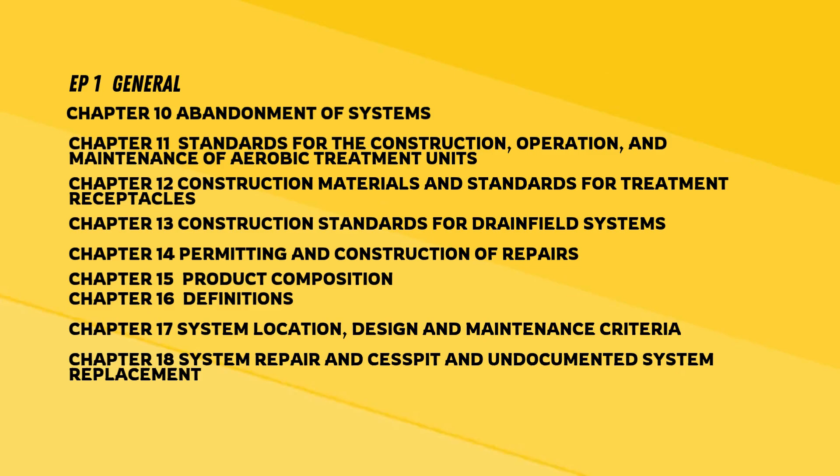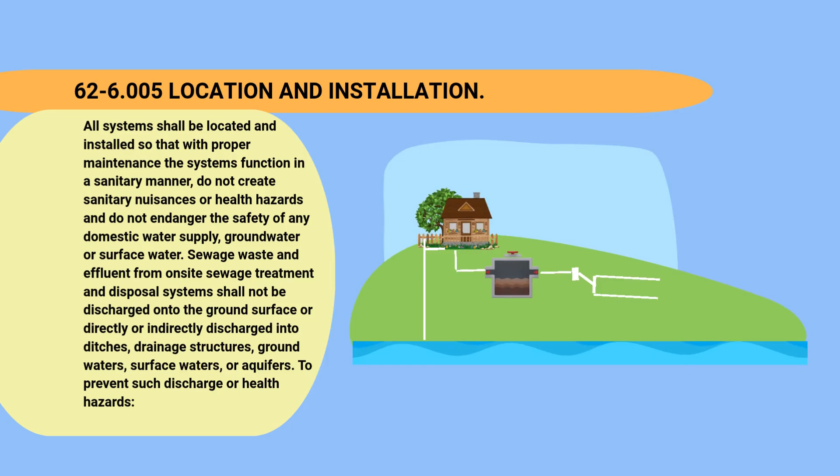All systems shall be located and installed so that with proper maintenance the systems function in a sanitary manner, do not create sanitary nuisances or health hazards, and do not endanger the safety of any domestic water supply, groundwater or surface water. Sewage waste and effluent from on-site sewage treatment and disposal systems shall not be discharged onto the ground surface or directly or indirectly discharged into ditches, drainage structures, groundwaters, surface waters, or aquifers.

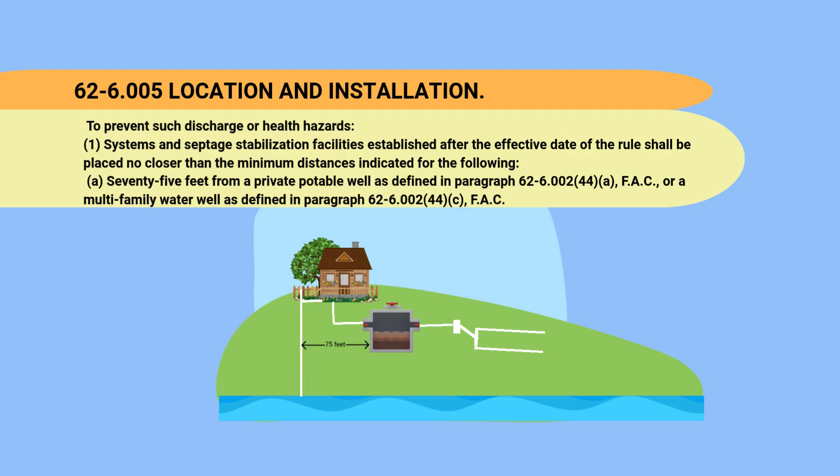To prevent such discharge or health hazards: 1. Systems and septage stabilization facilities established after the effective date of the rule shall be placed no closer than the minimum distances indicated for the following. A. 75 feet from a private potable well as defined in paragraph 62-6.002(44)(a) FAC, or a multifamily water well as defined in paragraph 62-6.002(44)(c) FAC.

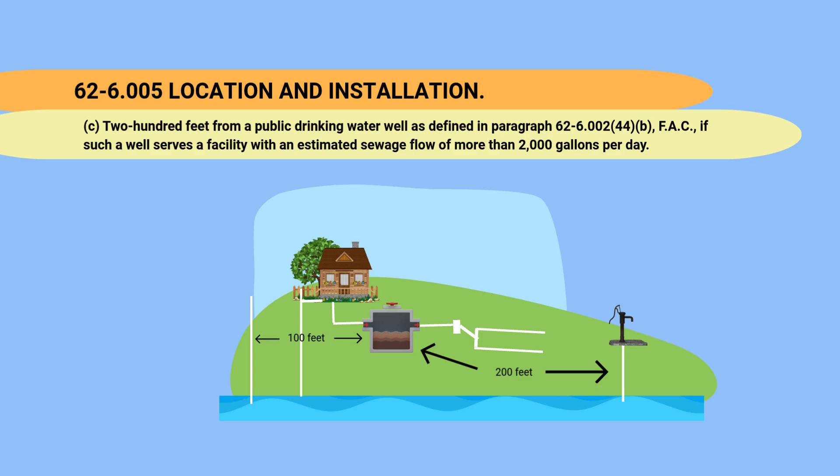B. 100 feet from a public drinking water well as defined in paragraph 62-6.002(44)(b) FAC, if such a well serves a facility with an estimated sewage flow of 2,000 gallons or less per day. C. 200 feet from a public drinking water well as defined in paragraph 62-6.002(44)(b) FAC, if such a well serves a facility with an estimated sewage flow of more than 2,000 gallons per day. D. 50 feet from a non-potable water well as defined in subsection 62-6.002(39) FAC.

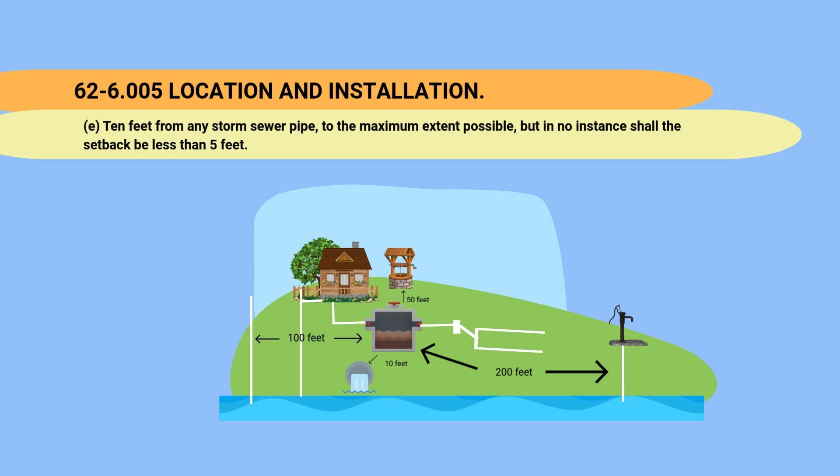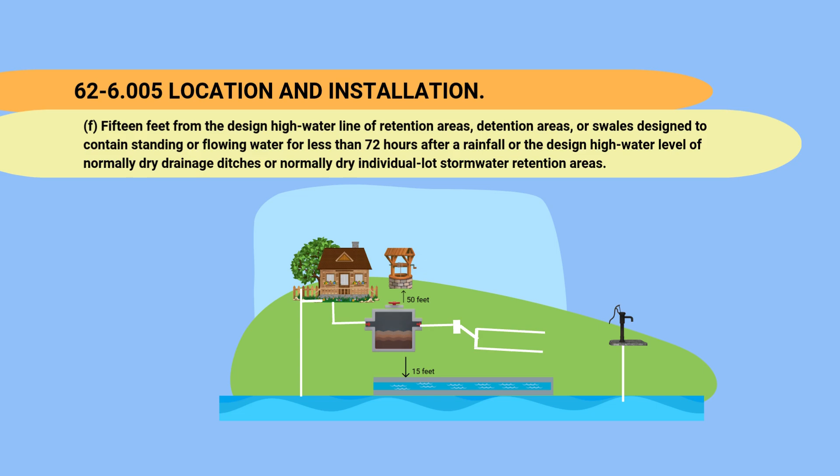E. 10 feet from any storm sewer pipe, to the maximum extent possible, but in no instance shall the setback be less than 5 feet. F. 15 feet from the design high water line of retention areas, detention areas, or swales designed to contain standing or flowing water for less than 72 hours after a rainfall, or the design high water level of normally dry drainage ditches or normally dry individual lot stormwater retention areas.

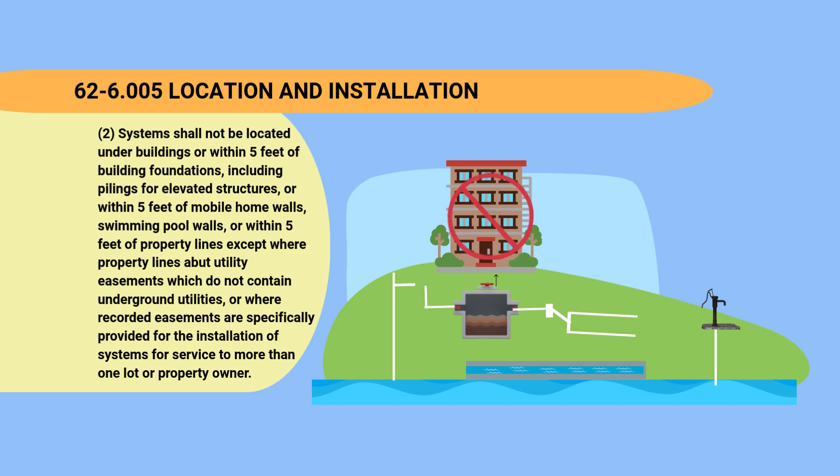2. Systems shall not be located under buildings or within 5 feet of building foundations, including pilings for elevated structures, or within 5 feet of mobile home walls, swimming pool walls, or within 5 feet of property lines, except where property lines abut utility easements which do not contain underground utilities, or where recorded easements are specifically provided for the installation of systems for service to more than one lot or property owner.

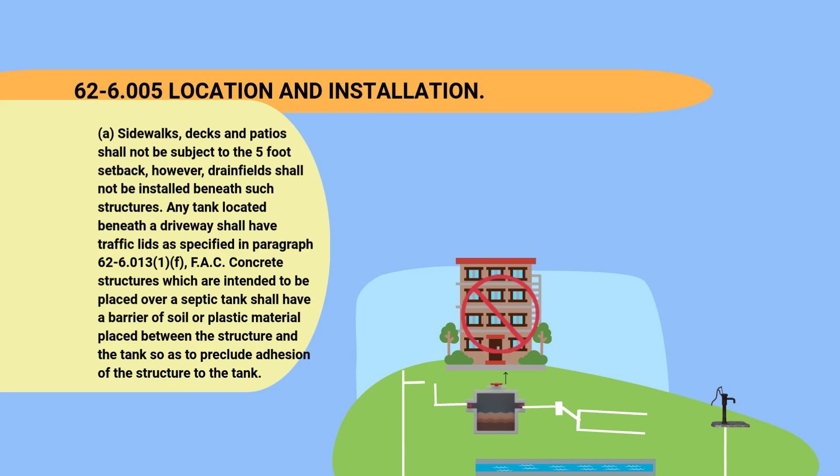A. Sidewalks, decks and patios shall not be subject to the 5-foot setback. However, drainfields shall not be installed beneath such structures. Any tank located beneath a driveway shall have traffic lids as specified in paragraph 62-6.013(1)(f) FAC. Concrete structures which are intended to be placed over a septic tank shall have a barrier of soil or plastic material placed between the structure and the tank so as to preclude adhesion of the structure to the tank.

B. Systems shall not be located within 10 feet of water storage tanks in contact with the ground or potable water lines unless such lines are sealed with a waterproof sealant within a sleeve of similar material pipe to a distance of at least 10 feet from the nearest portion of the system, or the water lines themselves consist of Schedule 40 PVC or stronger. In no case shall the water line be located within 24 inches of the on-site sewage treatment and disposal system.

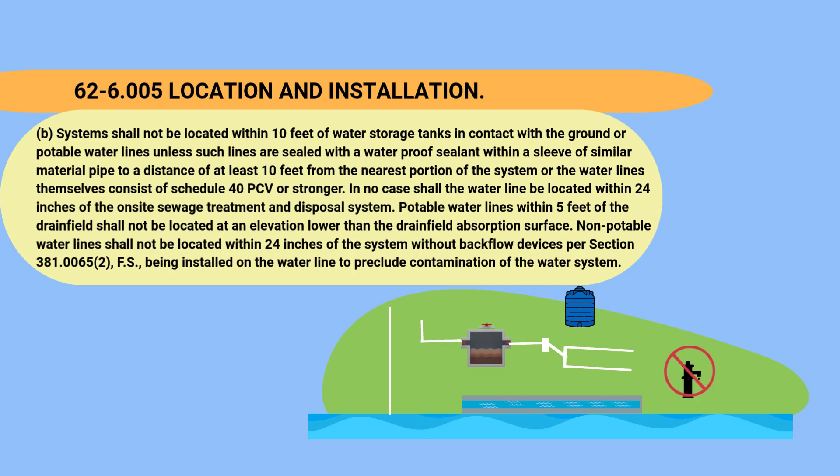Potable water lines within 5 feet of the drainfield shall not be located at an elevation lower than the drainfield absorption surface. Non-potable water lines shall not be located within 24 inches of the system without backflow devices, per section 381.0065(2) FS, being installed on the water line to preclude contamination of the water system. C. Systems shall be set back a minimum of 15 feet from groundwater interceptor drains.

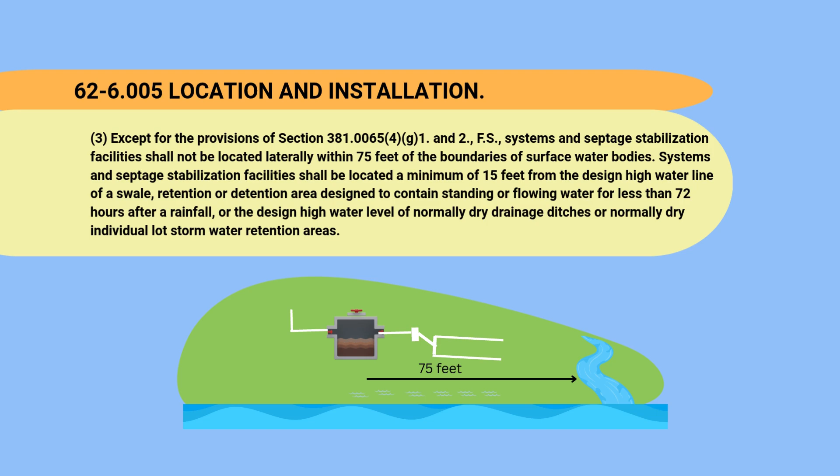3. Except for the provisions of section 381.0065(4)(g)(1) and (2) FS, systems and septage stabilization facilities shall not be located laterally within 75 feet of the boundaries of surface water bodies. Systems and septage stabilization facilities shall be located a minimum of 15 feet from the design high water line of a swale, retention or detention area designed to contain standing or flowing water for less than 72 hours after a rainfall, or the design high water level of normally dry drainage ditches or normally dry individual lot stormwater retention areas.

4. Suitable, unobstructed land shall be available for the installation and proper functioning of the system. The minimum unobstructed area shall: A. Be at least 1.5 times as large as the drainfield absorption area required by rule. For example, if a 200 square foot drainfield is required, the total unobstructed area required, inclusive of the 200 square foot drainfield area, would be 300 square feet.

Unobstructed soil area between drain trenches shall be included in the unobstructed area calculation. B. Be contiguous to the drainfield. C. Be in addition to the setbacks required in subsections 1, 2, and 3 above. 5. On-site sewage treatment and disposal systems.

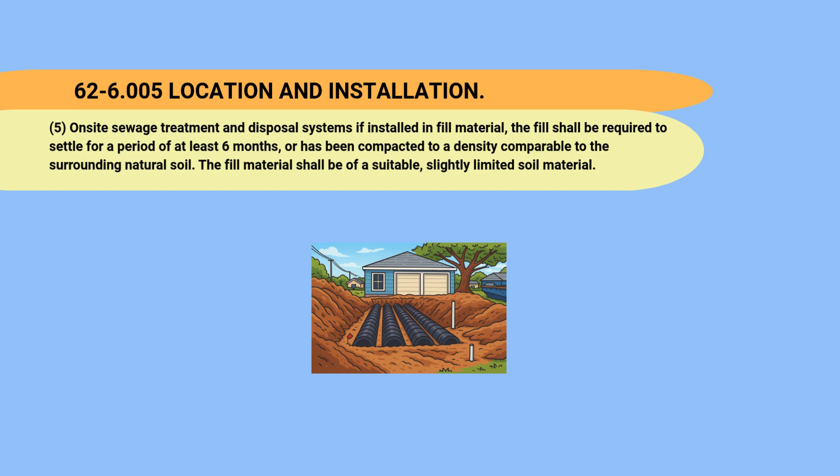If installed in fill material, the fill shall be required to settle for a period of at least 6 months, or has been compacted to a density comparable to the surrounding natural soil. The fill material shall be of a suitable, slightly limited soil material.

To prevent soil smear and excessive soil compaction, drainfields shall not be installed in soils with textures finer than sand, loamy sand, or sandy loam when the soil moisture content is above the point at which the soil changes from semi-solid to plastic.

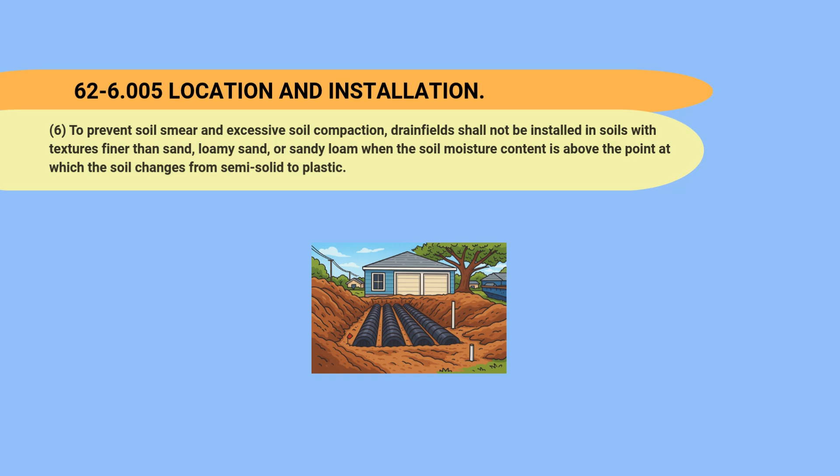On-site sewage treatment and disposal systems shall be installed where a sewerage system is not available and when conditions in sections 381.0065(4)(a)(g), F.S., are met.

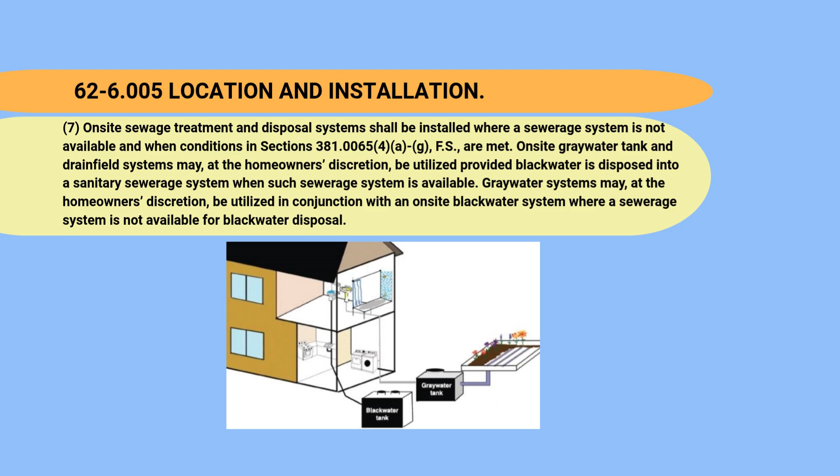On-site graywater tank and drainfield systems may, at the homeowner's discretion, be utilized provided blackwater is disposed into a sanitary sewerage system when such sewerage system is available. Graywater systems may, at the homeowner's discretion, be utilized in conjunction with an on-site blackwater system where a sewerage system is not available for blackwater disposal.

A. The lot area under section 381.0065(4)(a), F.S., must consist of at least 1/2 acre, 21,780 square feet. Contiguous area outside of the lot must not be included.

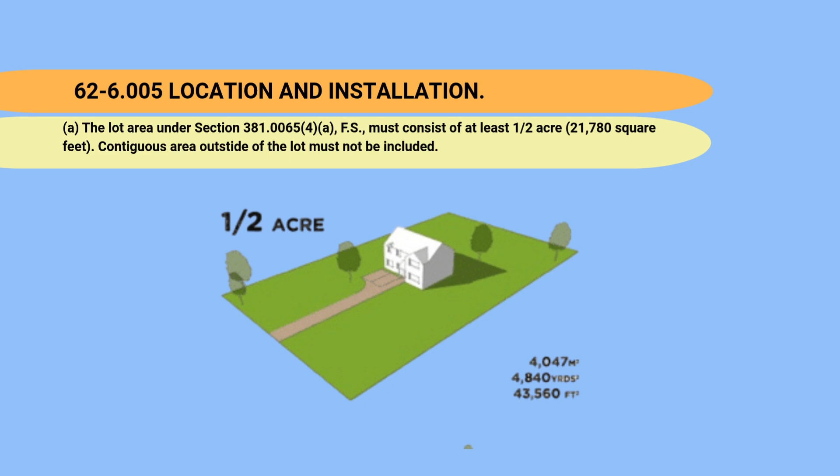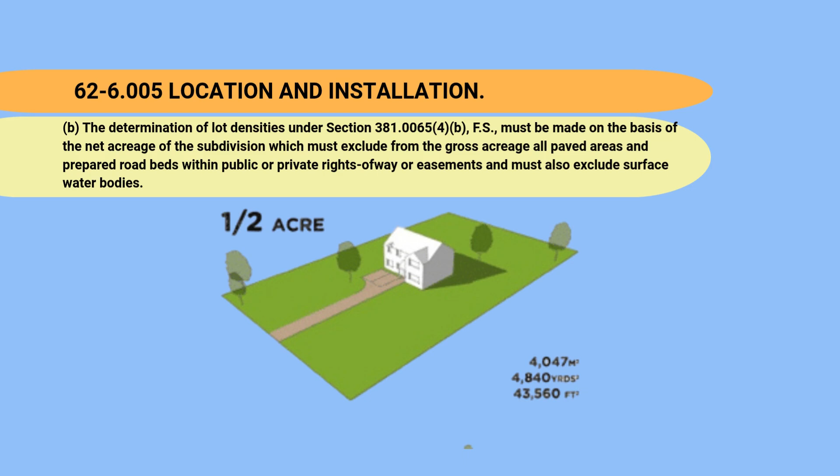B. The determination of lot densities under section 381.0065(4)(b), F.S., must be made on the basis of the net acreage of the subdivision, which must exclude from the gross acreage all paved areas and prepared road beds within public or private rights of way or easements, and must also exclude surface water bodies.

C. Maximum daily sewage flow allowances specified in sections 381.0065(4)(a)(b) and (g), F.S., must be calculated on an individual lot-by-lot basis based on its net usable area in acres. The net usable area of each lot or parcel of land does not include paved areas and prepared road beds within public rights of way or easements and does not include surface water bodies.

Contiguous unpaved and non-compacted road rights of way and easements with no subsurface obstructions that would affect the operation of drainfield systems may be included in determining the net usable area. Where an unobstructed easement is contiguous to 2 or more lots, each lot will receive its pro rata share of the area contained in the easement.

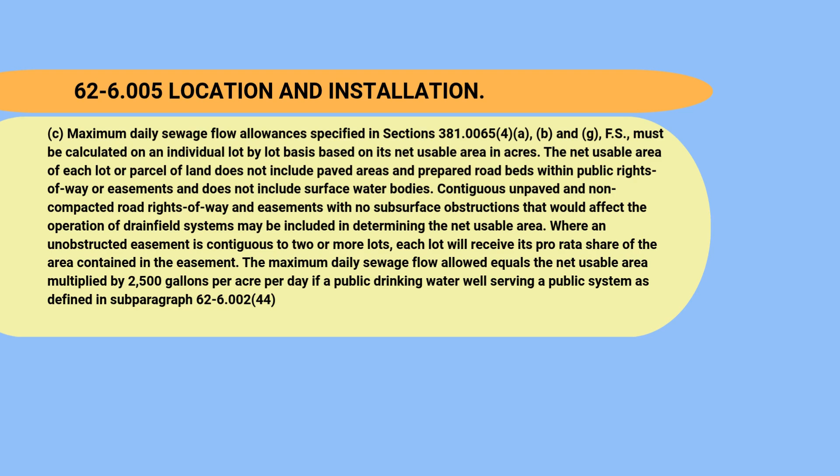The maximum daily sewage flow allowed equals the net usable area multiplied by 2,500 gallons per acre per day if a public drinking water well serving a public system as defined in subparagraph 62-6.002(44)(b)(1)(2) or (3), F.A.C., is utilized, or multiplied by 1,500 gallons per acre per day if a public drinking water well serving a public water system as defined in subparagraph 62-6.002(44)(b)(4), F.A.C., or a private potable well or cistern is utilized.

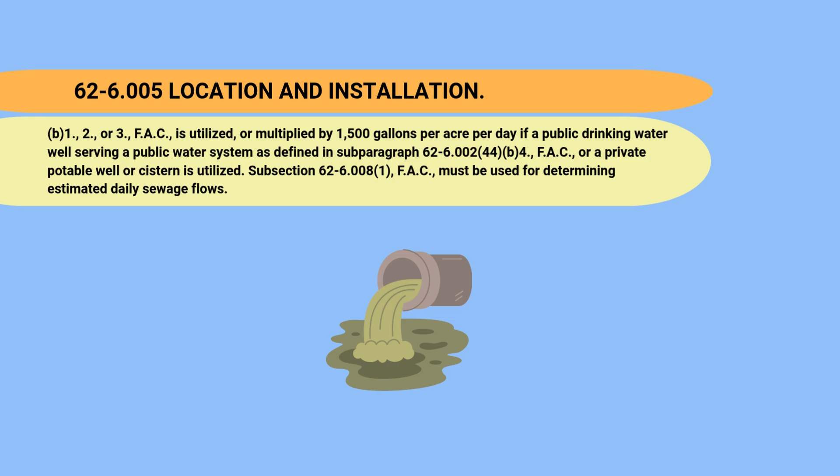Subsection 62-6.008(1), F.A.C., must be used for determining estimated daily sewage flows.

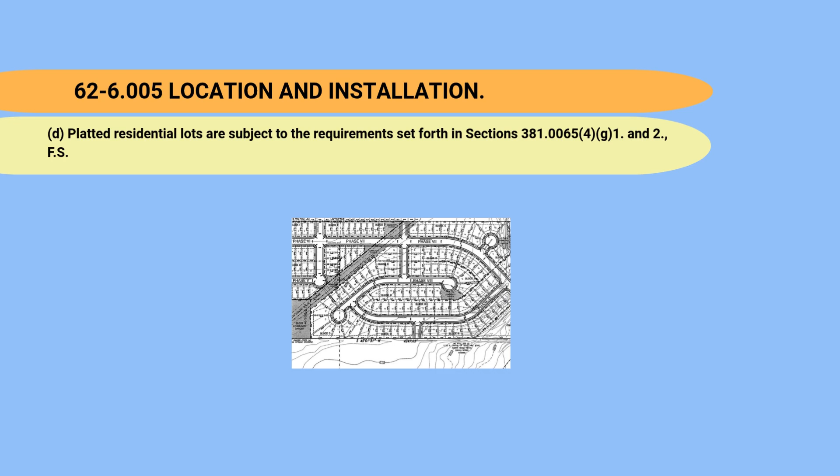D. Platted residential lots are subject to the requirements set forth in sections 381.0065(4)(g)(1) and (2), F.S., E, when portions of a lot or lots which were platted prior to January 1, 1972 are combined in such a manner that will decrease the total density of the subdivision. Pre-1972 lot provisions apply. However, the maximum setback possible to surface water bodies must be maintained with a minimum setback of 50 feet.

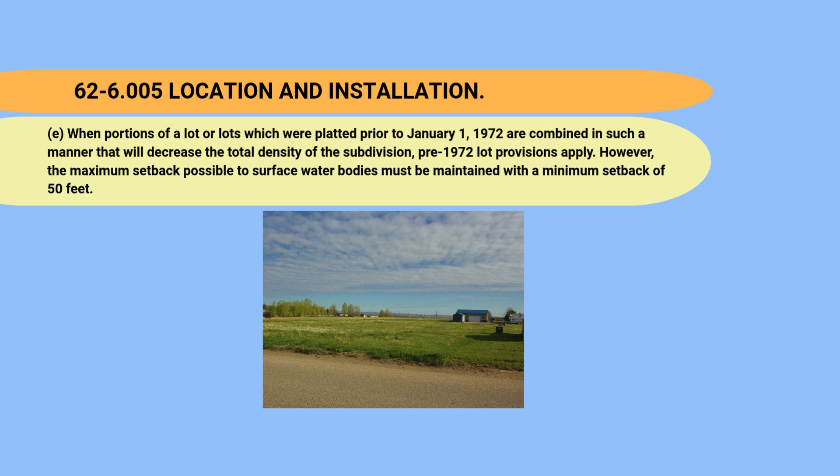8. Notwithstanding the requirements of this section, where an effluent transmission line consists of Schedule 40 PVC, the transmission line must be set back from private potable wells, irrigation wells or surface water bodies by not less than 25 feet when installed.

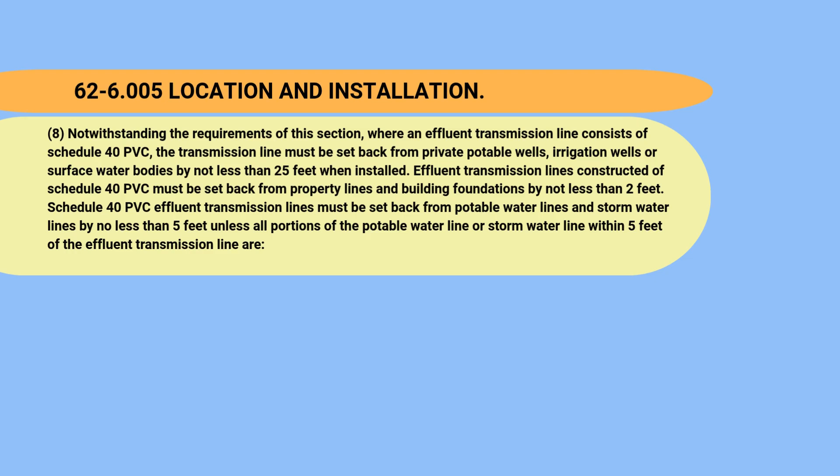Effluent transmission lines constructed of Schedule 40 PVC must be set back from property lines and building foundations by not less than 2 feet. Schedule 40 PVC effluent transmission lines must be set back from potable water lines and stormwater lines by no less than 5 feet unless all portions of the potable water line or stormwater line within 5 feet of the effluent transmission line are a minimum of 12 inches above the top of the effluent transmission line, and sealed with a waterproof sealant within a sleeve of Schedule 40 PVC or stronger pipe, or the water line itself consists of Schedule 40 PVC or stronger pipe.

9. On-site sewage treatment and disposal systems for estimated establishment domestic sewage flows exceeding 5,000 gallons per day but not exceeding 10,000 gallons per day must be located and installed under the following conditions.

A. The estimated daily sewage flow from the establishment will be divided by the net usable area associated with the establishment. The resulting number must not exceed 2,500 gallons per acre per day for establishments which use a water supply as defined in subparagraph 62-6.002(44)(b)(1)(2) and (3), F.A.C.

B. No more than 5,000 gallons of wastewater will be discharged into any single on-site sewage treatment and disposal system serving the establishment.